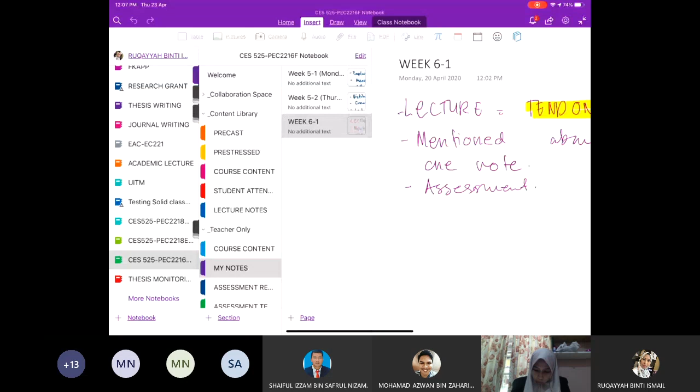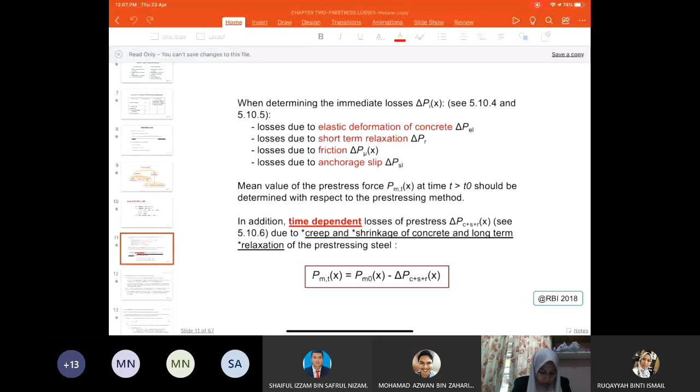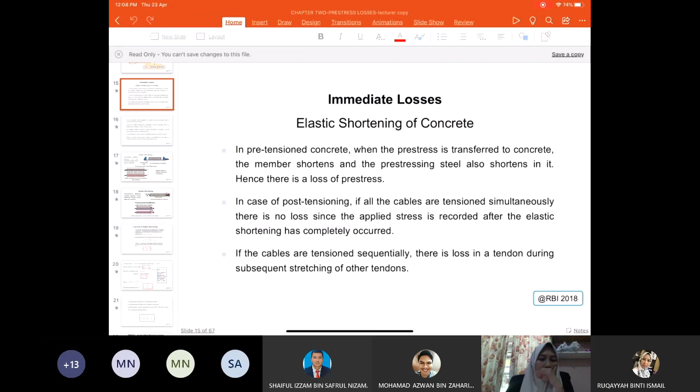Okay, may I know where did we stop last time for your group? I think it's this slide, is it? If I'm not mistaken, am I right? Can anyone correct me if I'm wrong? Anyone?

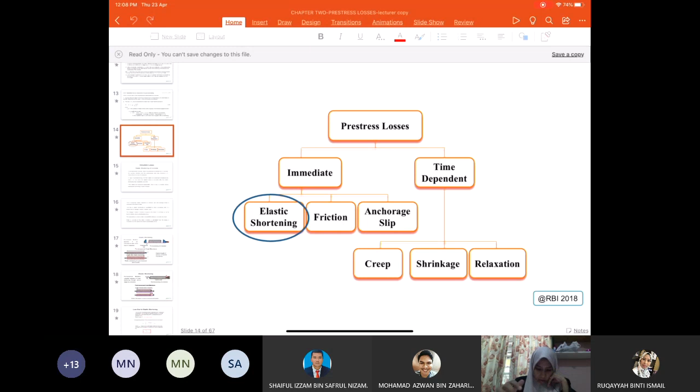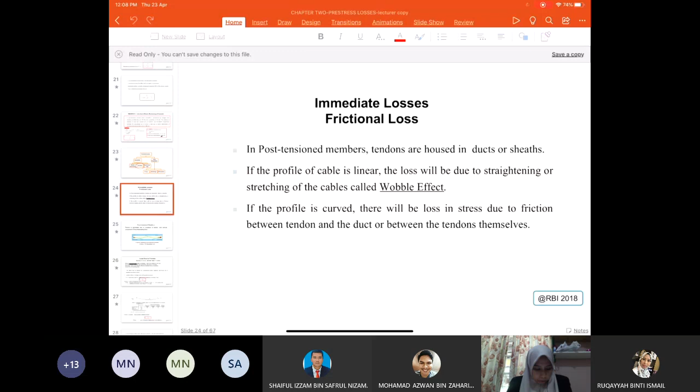Friction loss. Oh okay, we already covered friction loss. So friction loss means we start with friction loss, this slide, am I correct? Yes? Can anyone verify, please, as well? Yes, madam. Okay, all right, yeah. Thank you very much, Azwan, for responding, really appreciate that.

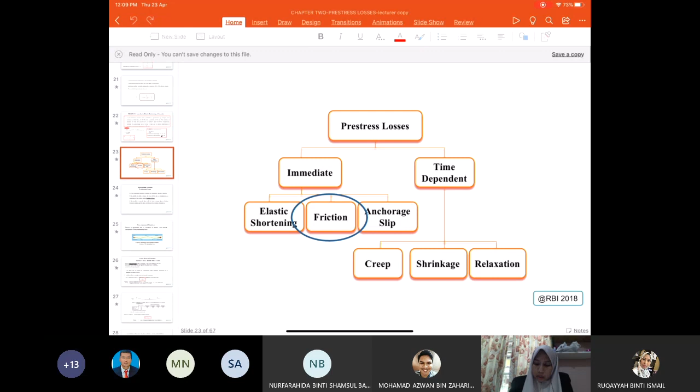Okay, so we're gonna continue our lecture, which last time we stopped at elastic shortening. Sorry about being a bit lost there, because your group started with 2 hours and then had 1 hour later, while the other two groups started with 1 hour, so then we continue with 2 hours. Normally I finish this pre-stress loss slide within 2 hours, so for your group you kind of stopped in the middle of the lecture because you had 2 hours first, and then the remaining 1 hour is where I get to finish the slide. All right, so we're going to continue.

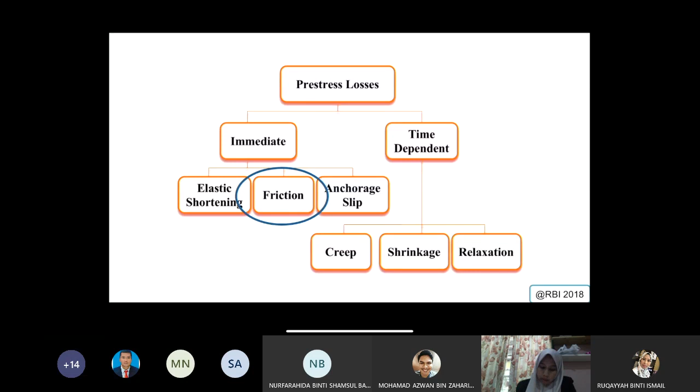Bismillahirrahmanirrahim. Okay, all right, so friction, yeah. So we go to the second immediate pre-stress loss, which is friction. For friction, we call it frictional loss, all right? So for friction, why is there friction?

Friction exists due to, when we have post tension. When we have post tension, then we have what we call a duct, and also a sheath, where we place the tendon inside the beam. We have to have the duct because we do the concreting first before we pre-stress the tendon. So the reason for that is, if you can recall our tendon profile before.

We have two conditions of the cable, right? So the cable can be a straight line, meaning linear, or it could also be a parabolic cable, meaning it has a curved area, a curved behavior.

So when you have that, especially in a post tension member or beam, basically your duct also will behave like that. Meaning if the tendon is a straight line, then your duct is also straight. If your tendon is a curved or parabolic tendon, then your ducts will also be curved. So when you apply your force, when you want to pre-stress and pull your tendon, it's not really an issue if it's linear.

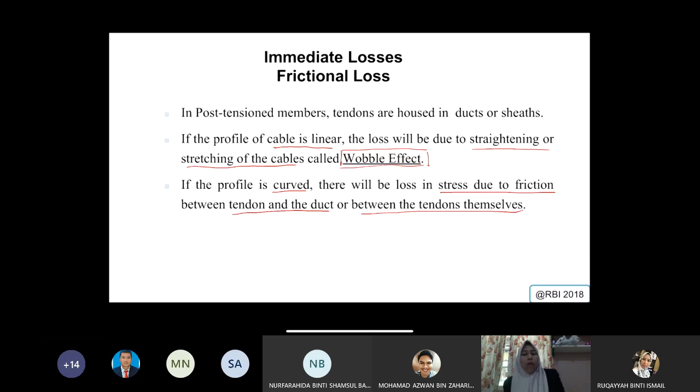Okay, so if the profile is curved, there will be loss in stress due to friction between tendon and duct, or between the tendons themselves. Okay, all right, so that's what happened.

So we have an example here where we have a curved tendon along the length of the beam. You see that the tendon is curved like this. So what you see here is the duct bed generally, and this is all the cable inside.

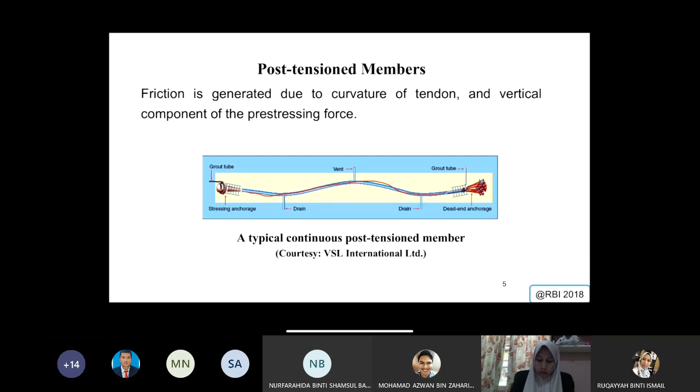So friction is generated due to curvature of tendon and vertical component of the pre-stressing. According to the BSEN code, the friction will tend to resist this movement, hence reducing the effective pre-stress force at position remote from the jacking point. Okay, so this is what I explained before.

Okay, first we look at straight tendon, linear tendon, which is not parabolic. So in the case of linear or straight, generally we can use this equation.

So you have px, which is cable force at distance x from jack, and p naught, which is the jack force, and e here is not eccentricity, it's actually based on Napierian logs, which you can take as value 2.718. And you could use the K value in a range of between 0.005 to 0.01 radians per meter.

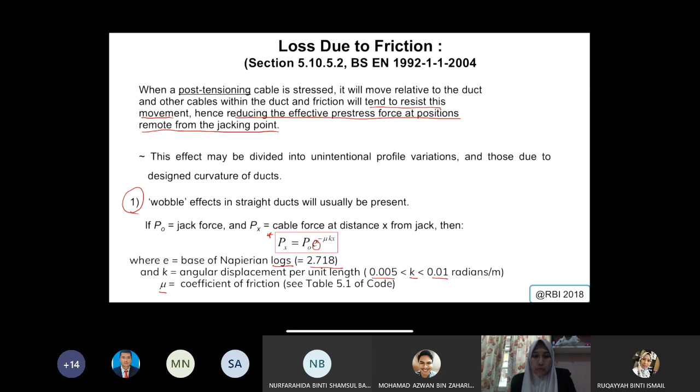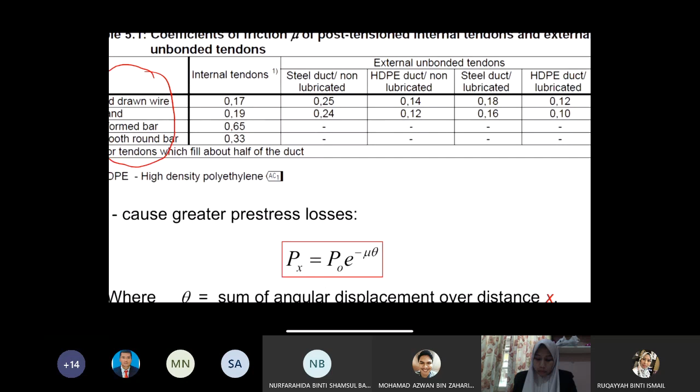And then you have mu, which is the coefficient of friction. To get mu, you refer to table 5.1. When you refer to table 5.1, what you will look at is actually the type of tendon that you use. Either it's an internal tendon, or it's an external unbonded tendon.

So if it's for internal tendon, you can simply take the value of your coefficient of friction. If it's for external unbonded tendon, you have this condition, where you have to choose what kind of duct you are using. Is it steel duct? Is it high density polyethylene duct? Is the duct lubricated or not?

As we know, lubrication, when you grease or lubricate your tendon, any lubricant you can use, it will reduce the friction. So that's why when you choose your coefficient of friction, it's very important to identify whether your tendon is lubricated or not, because the value of your coefficient will differ from the non-lubricated one.

Non-lubricated will of course be higher than the lubricated one. So here's the first condition, whereby when the duct or tendon is linear, it's a straight line. If the duct is curved, it means there's a parabolic shape, and of course it will experience greater pre-stress losses compared to the straight line.

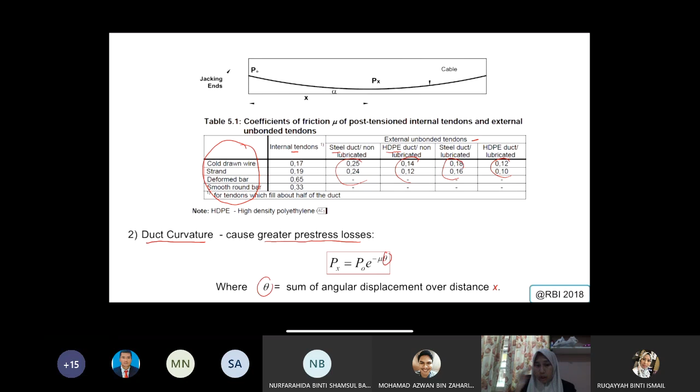One of the obvious differences will be the existence of theta, which is the angular displacement over distance x, for the position of the tendon. In accordance with the code, loss due to friction can be estimated from this equation, where theta is the angular displacement, k, and x is as stated here.

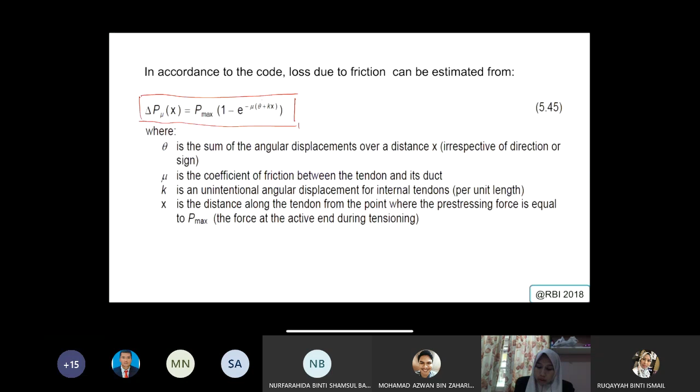If you look into the example, this shows you how to calculate the loss due to friction. In this example, they give you three conditions of cable: cable 1, cable 2, and also cable 3.

Cable 1 is parabolic with eccentricity of 50mm above the centroid at the support and 50mm below the centroid at center of span. Cable 2 is also parabolic, with zero eccentricity at support and 50mm below at the center of span. Cable 3 is straight with uniform eccentricity of 50mm below the neutral axis. So you have different positions and eccentricities, and at the center span also different.

If the cables are tensioned from one end only, it's because it's a post-tension. Estimate the percentage loss of stress in each cable due to friction. Assume K is equal to 0.005 per meter. Given the equation of parabolic cables is Y equals 4E over L squared multiplied with XL minus X squared.

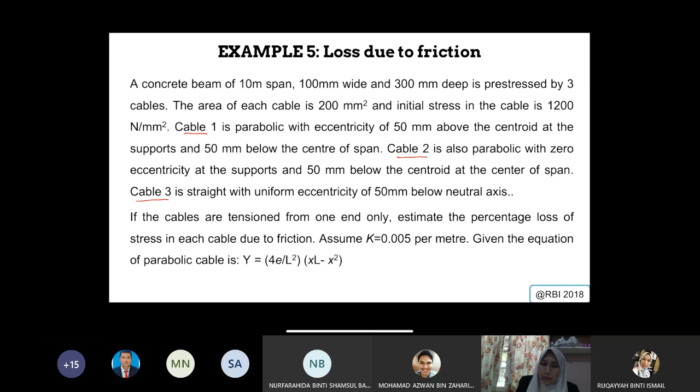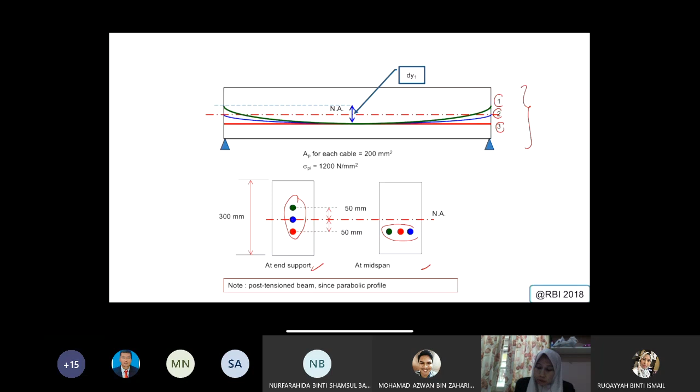So if you look here, this is the diagram of how the cable looks, because we have three cables: cable 1, cable 2, cable 3. This shows the cross section at end span and also at mid span, where the position of the cable is different, the eccentricity is different. You can check back with the question later on yourself.

I just want to show you quickly how they calculate this, considering one by one: cable 1, cable 2, and cable 3. You take the mu by internal strand from table 5.1, so you can decide what type of material you use and so on.

Slope at the ends at x equals 0, you get the slope equals 4e over L. Then you can calculate it and you get theta is actually 0.008 radians. Between tangents, consider tangents, here we have cable 2. The difference will be the value of the slope at the end, because you have a different E here, so it gives you a different theta as well.

The initial pre-stressing in each cable, you're going to get like 1200 for the force multiplied with 200 as the area of the tendon, then the initial force is around 240.

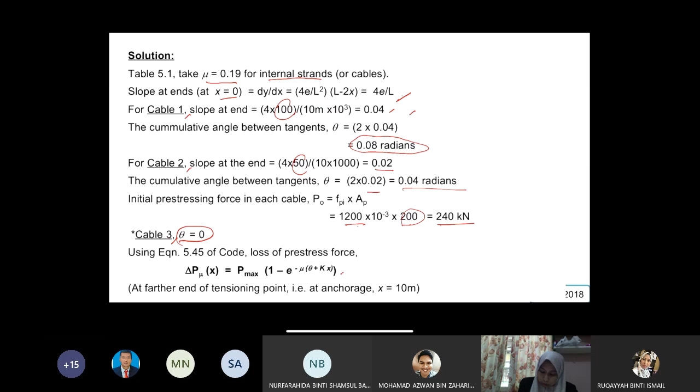For cable 3, there's no slope because it's a straight line, then you have this equation where at anchorage x equals 10 meters. Then loss for each of the cables you can calculate one by one: calculate cable 1 by putting in all the values of mu or K, then you have the loss for cable 2 and also loss for cable 3. Each cable will have its own loss.

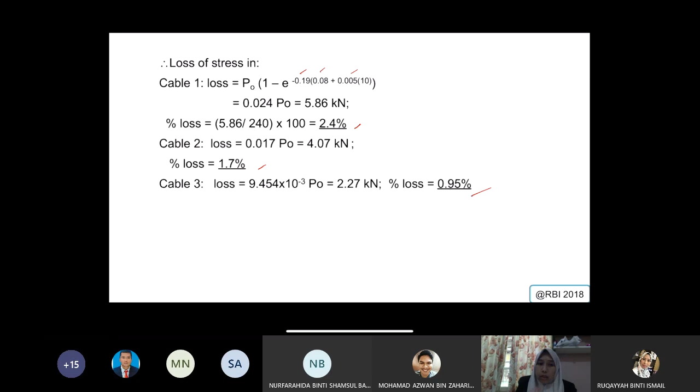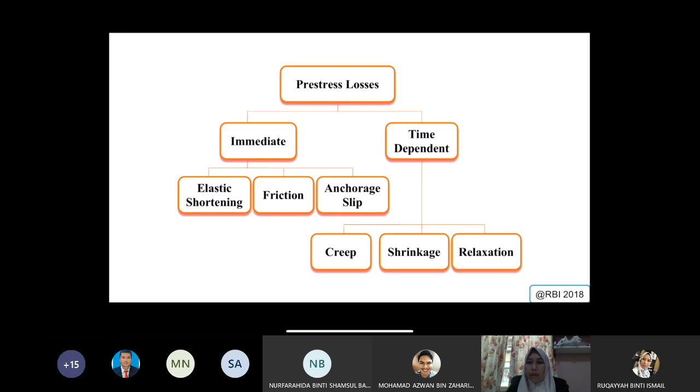If you want the total, then you will total each contribution from each cable. Do I make myself clear? Fatim Nadia, are you clear?

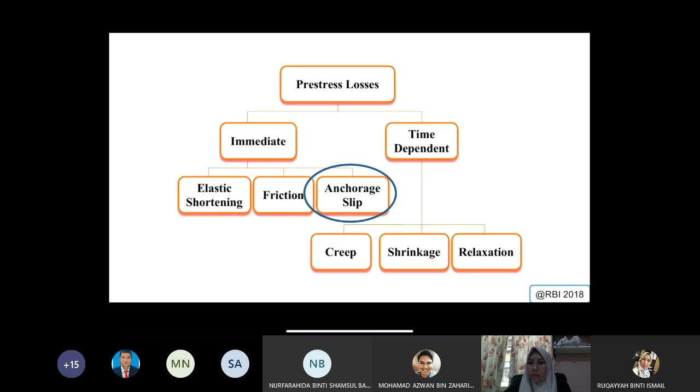All right, so next we'll go for anchorage slip. Friction loss and anchorage slip is only experienced by post-tensioning systems, not by pre-tensioning systems, because the prestressing method is conducted after concreting. So these losses will be considered for post-tensioning.

In most post-tensioning systems, when the tendon force is transferred from the jack to the anchoring ends, the friction wedges slip over a small distance. The behavior is actually simple to understand: if you have something very tight, like a bolt screw, and you have a bar, and you try to pull the bar, what will happen? The connection gripping the bar is trying to hold the bar from moving.

When the force is so big, so strong, it will somehow be able to move the tendon, the bar. What will happen to the one gripping the bar? The grip, the system that's gripping the bar, will also move. There will be some kind of movement, because it's letting the bar go towards the force slowly, or gradually.

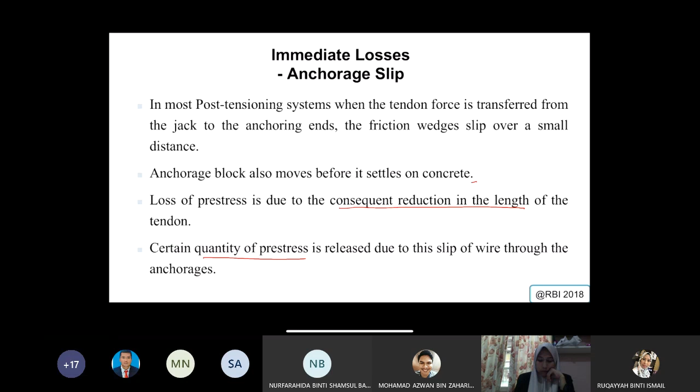Loss of pre-stress is due to the consequent reduction in the length of the tendon. We consider that when the length is shortened, there is a loss of pre-stress. A certain quantity of pre-stress is released due to this slip of wire through the anchorage. This is what we were talking about before.

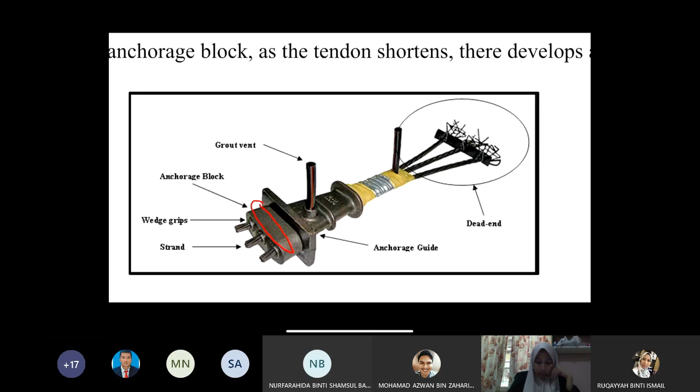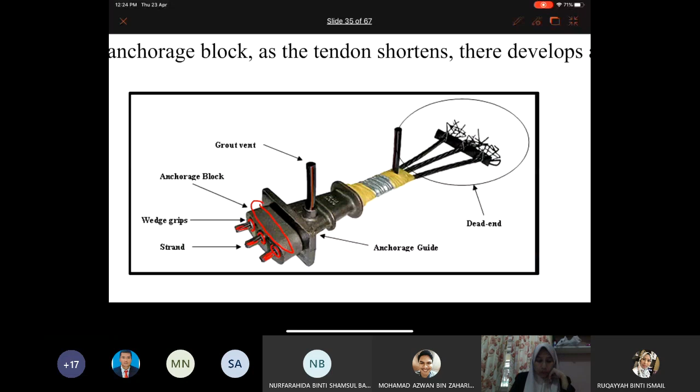If you look into this picture, here is what we call the anchorage block. This is the one holding the tendon here. If you can see this one, it's like a ring in the picture. I cannot enlarge it anymore; this is the largest I can show.

This is the wedge. The wedge functions like a washer, like a ring, in between bolts and nuts. Normally between bolts and nuts we have the washer. We have a washer to reduce the friction, the direct friction between the bolts and the nut.

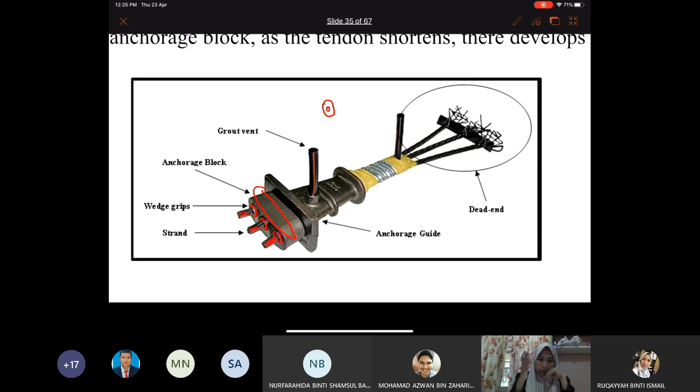So it's the same thing here. The washer is actually holding between the anchor grip and the tendon movement, when the tendon tries to move because you pull with the jack.

So the amount of slip depends on the type of wedge and the stress in the wire. The magnitude of slip can be known from the test or from the patents of the anchorage system.

So loss of stress is caused by a definite total amount of shortening, as we talked about before. The percentage loss is higher for a shorter member, because of the concentration of the force applied.

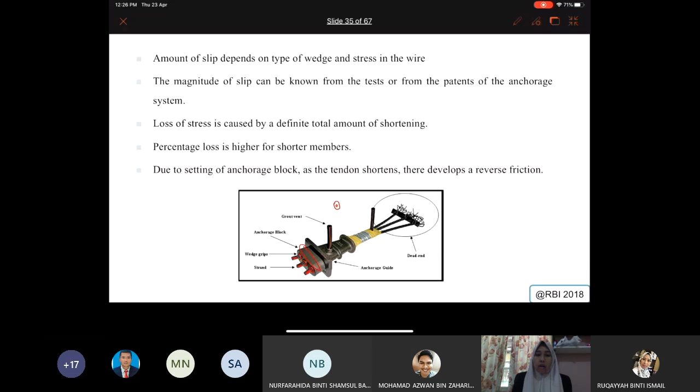Due to the setting of the anchorage block, as the tendon shortens, there develops a reverse friction because of the anchorage. So let's see how the loss is considered in anchorage.

In most post-tensioning systems, when the cable is tensioned and the jack is released to transfer pre-stress to concrete, the friction wedges employed to grip the wires slip over a small distance before the wires are firmly housed between the wedges. So there will be a movement, the movement that causes the anchorage loss to happen.

The magnitude of slip depends upon the type of wedge and the stress in the wire that we apply. Wedges are like washers as well; there are many types of wedges, and every wedge will contribute in different ways, able to reduce the loss.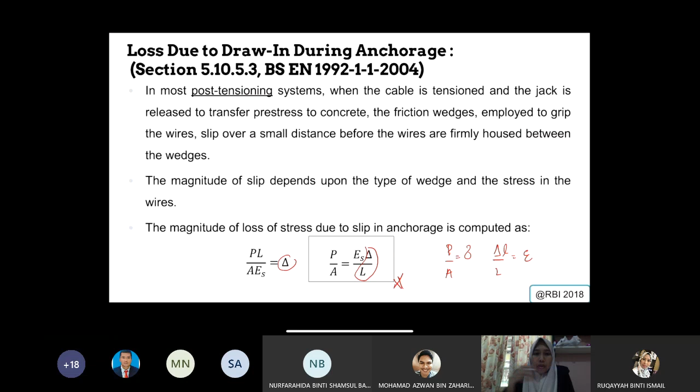Anchorage loss can be accounted for at the site by overextending the tendon during the pre-stressing operation, by the amount of draw-in before anchoring. So loss of pre-stress due to slip can be calculated, where you have a slip of anchor. This is a simplified version, but from the equation it's actually the same one.

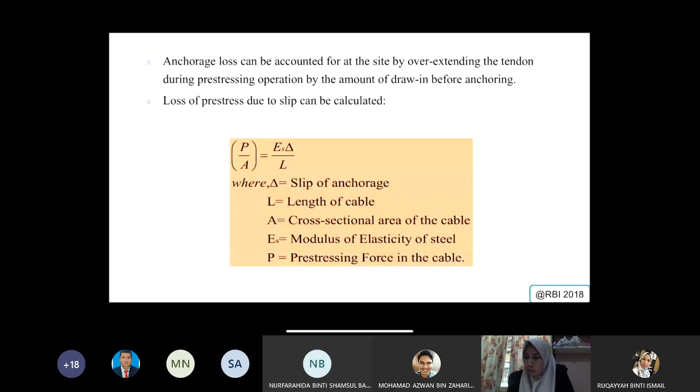A concrete beam is post-tensioned by a cable carrying an initial stress of, let's take a look at the example, shall we. Initial stress of 1000 Newton per mm square, the slip is around 5 mm, and the modulus is around 210 for steel. So we want to see the effect on a long beam and a shorter beam. We have a long beam about 30 meters and a shorter beam about 3 meters.

So, loss of stress - it's a very straightforward calculation whereby you just apply this equation, and we know that the strain given here is around 5 mm, which is the slip. It gives you directly what would be the slip.

What would be the slip? The shortened part, which is 5 mm. The slip is 5 mm. Multiply with E, and directly you get how much is the loss. It really depends on the distance of the slip - once you measure the distance of the slip, you're able to directly get what will be the loss of stress. Then you get 3.5%, and here you get 35%.

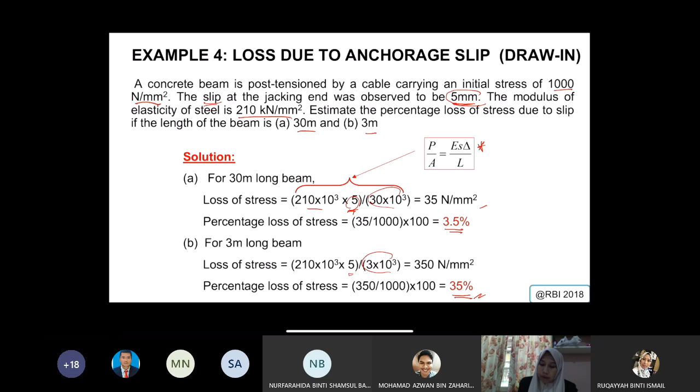So this kind of proves that when the beam is shorter in length, the loss in your anchor will be bigger. Regardless, it's the same slip, like 5 mm, it's still the same - it's just that when your length is shorter, then your beam will experience more loss in terms of anchorage. Alright, am I clear? Everyone can follow?

Okay, Asan, okay? Ahmad Asan, Izam, Inshira. Okay, madam. Mirza, okay, I hope everyone is okay. Yeah? Okay.

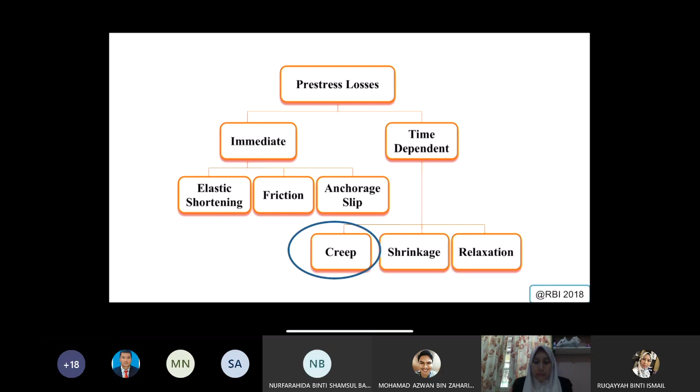Okay, let's look at how it performs. One factor will be creep. I'm sure everyone is familiar with concrete creep. We know that creep is not going to happen overnight—creep always happens through time. You can only see it maybe in 5 or 10 years or something like that.

You can see the degradation of the concrete itself due to the quality of the concrete material. It might be because of the age, the stress that you apply, the density of the material itself, the cement content, the grade of the cement, the quality of the cement, the water cement ratio—is it high, is it too dry, and so on.

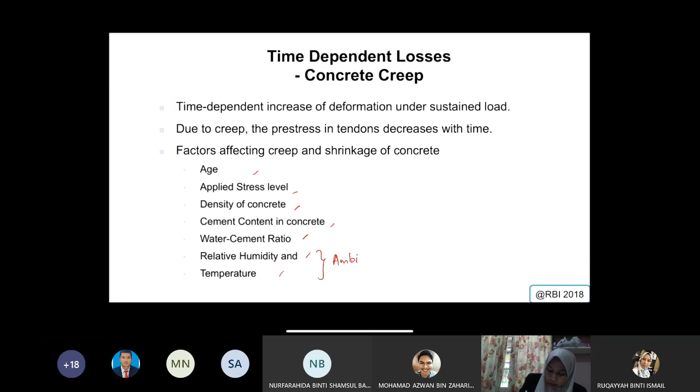Humidity and temperature, which is related with the ambient conditions of where you place the prestress beam.

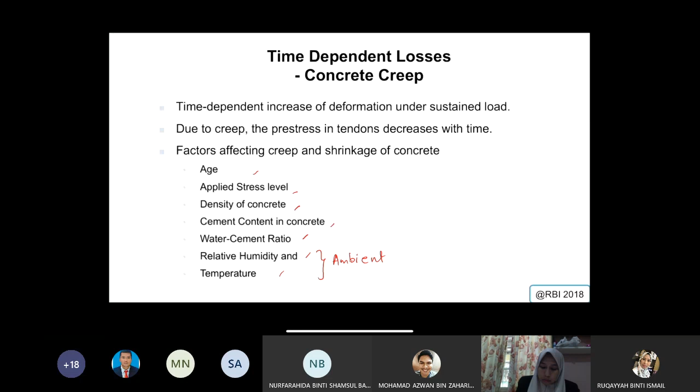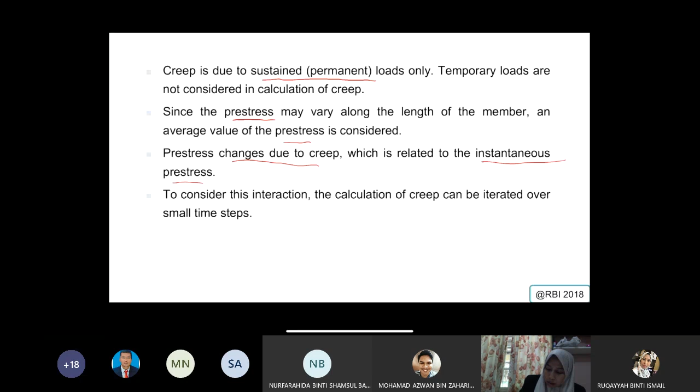So creep is due to, for prestress we say that creep is due to permanent loads only, where we try to estimate what is the creep loss. So temporary loads are not considered. Since the prestress varies along the length of the beam, an average value of prestress is considered. So changes due to creep are related to instantaneous prestress. To consider this interaction, the calculation of creep can be iterated over small time steps.

So in this case, what we estimate is actually we consider the use of the creep coefficient. I think we've used this before—you guys came across this value, if I'm not mistaken, in your RC design when you design for your slender column. One of you asked me about this, and then I remembered, oh okay, it's the same.

The creep strain is actually the one that you're going to use in terms of calculating what will be the total stress loss—meaning what is the loss of it. Then you'll be able to calculate the loss.

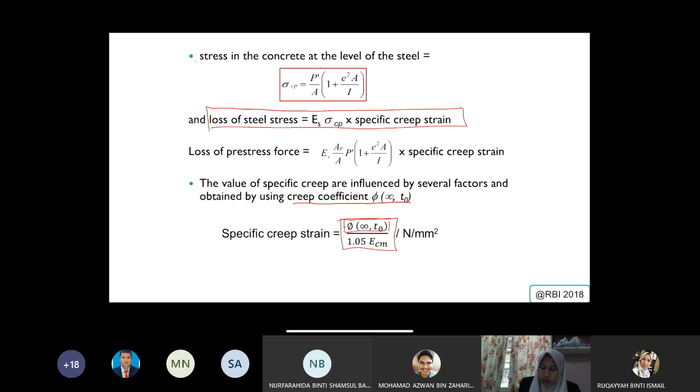So let's take a look at the examples here—it's a very straightforward example. If you look here, you have 100 mm times 300, the E50, the area of the cable, the final stress, and what will be the ultimate creep strain, the stress, and E.

And what you do is just use this equation to get your stress. This is where you calculate your tendon force, in kilonewtons, by considering the area of the cable. Multiply with the stress of the cable, then you get the force. And this is the initial moment—second moment of inertia.

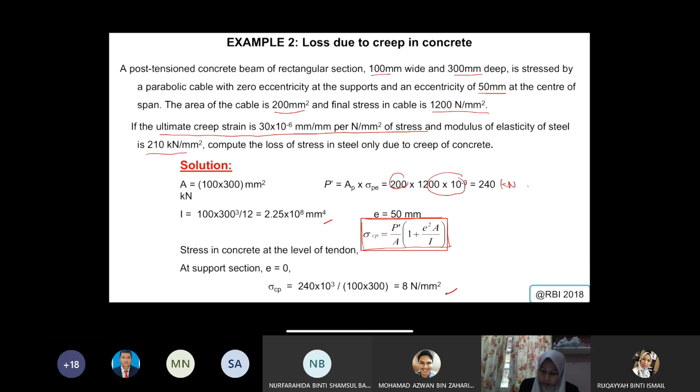Then you have this at the support section where E gives you the stress—what will be the stress loss, 8 Newton per mm squared. So once you get the 8, this is the value, the stress CP. Then you calculate at E 50 mm—just now you calculated for E at 0, here is E at 50, then you get 10.7.

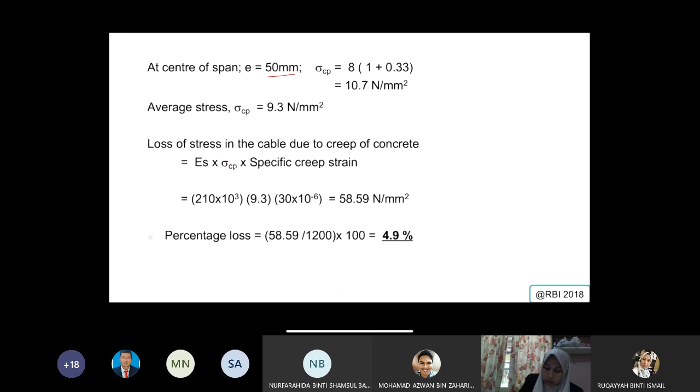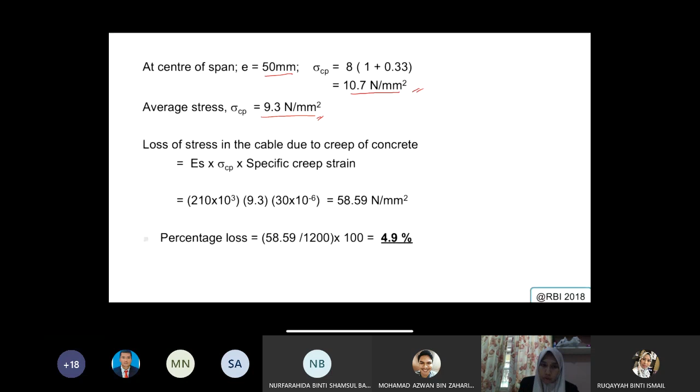So the average is around 9.3 for both conditions, because we want it throughout the length, so we just take the average value of your stress. Once you get your 9.3, multiply with the specific creep strain given in the question, plus times the modulus E, then you will get around this—this is the total stress.

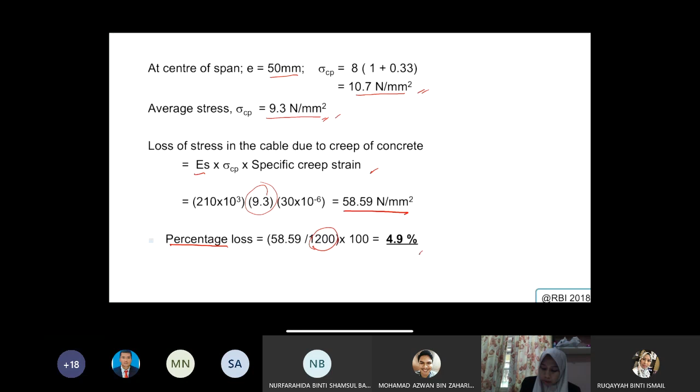The important thing is the average stress that you calculate for each condition of your E. Then the loss, the percentage of loss divided by the initial stress applied, multiplied by 100, gives you around 4.9% for the creep loss. Hope you guys are clear about that.

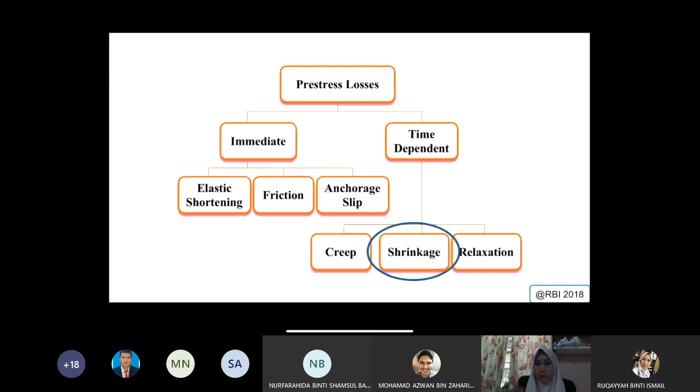So next we go for shrinkage. For shrinkage, normally for concrete, when you have creep, you're always going to have shrinkage as well—it's like a good pairing.

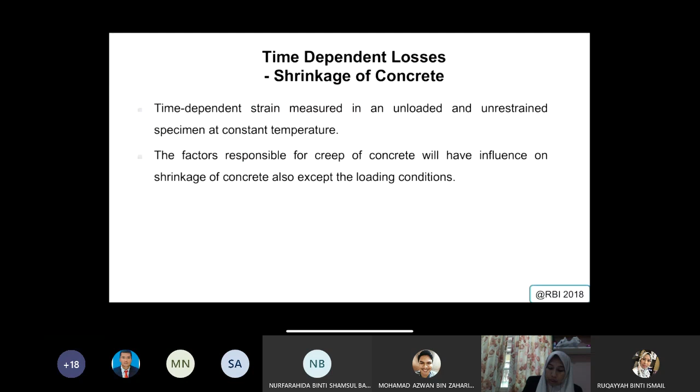Time dependent strain measured in an unloaded and unrestrained specimen at constant temperature. The factors responsible for creep in concrete will also have influence on shrinkage of concrete, except the loading condition. Due to shrinkage of concrete, the shrinkage to be considered depends upon the following factors.

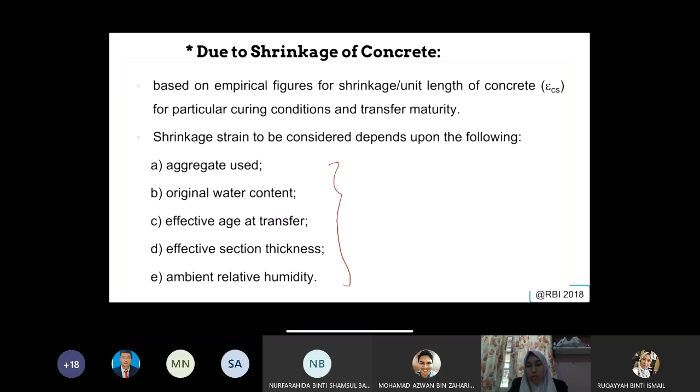It's the same as what you have for creep. It all depends on the material quality, which is the type of aggregate used, the water content, the age at transfer, whether it is too early or too late, and the effective section thickness.

And what will be the ambient condition, the humidity, the temperature, and so on. For shrinkage, humidity is one of the important factors to be considered when you want to calculate shrinkage. This example is taken from Mosley's book.

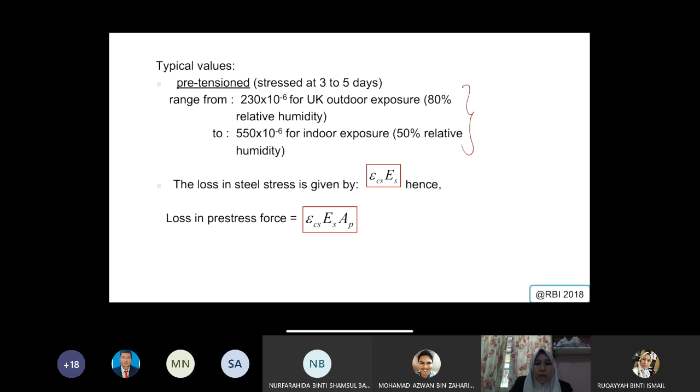The main reference is from the Eurocode, along with the UK annexes. That's why the value of 80% relative humidity, 50% and so on, is all based on UK temperature data.

So the loss in steel stress is given using this approach. For Malaysia, you just go to the Malaysian annex, then you will get the data for our country.

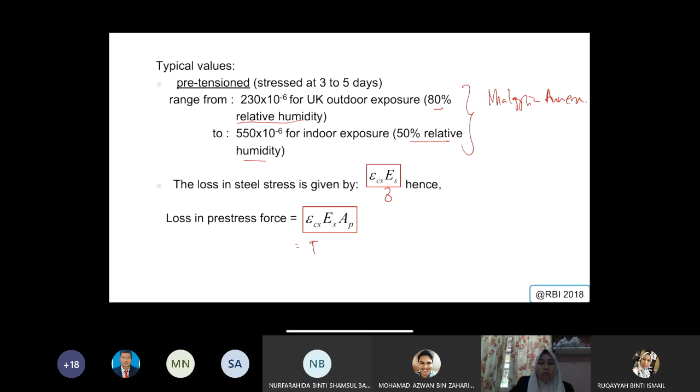The loss in steel stress is given by strain CS multiplied with modulus, and then you have the force, because this is already the stress, you multiply with the area, then you get the force.

Since the tendon is placed inside the concrete, any movement of the concrete will kind of affect the tendon directly. So the losses, even though it's the concrete which experiences the shrinkage, somehow it will affect the tendon.

A concrete is prestressed by a cable carrying an initial prestress force of 300 kilonewton. The cross-sectional area is 300 mm square. Calculate the percentage loss of stress in the cable due to shrinkage for the pre-tensioned beam.

Assume Es is 210 kilonewton per mm square and the total residual shrinkage strain is about 300 times 10 power minus 6. This is the important value actually, the total residual shrinkage, is where you're gonna use it.

This somehow is going to be placed here, which will give you what will be the value for your loss of stress. When you calculate, you divide with the initial stress, then you will get around 6.3%.

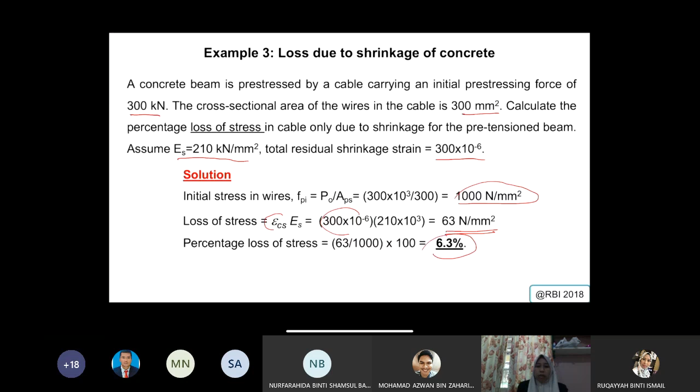So if you notice, in terms of prestress loss, the calculation is very straightforward. You're calculating the loss depending on what will be the value of each parameter that caused the loss.

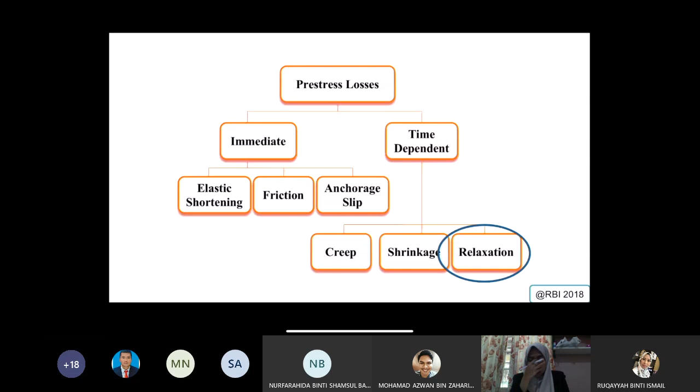Lastly will be steel relaxation. I don't want to talk much about this. Basically, we talked about how steel behaves before, where it goes linear, goes plastic, goes into hardening, and then it will fail.

When you go elastic, then when you let it go, it will go back to its original state. When it passes through plastic, when you let it go, it will not go back to its original. So when you go back, it will go back somewhere here, and then you have some stress losses experienced by the steel.

So in a way, we say that decrease in the stress is due to the fact that some of the initial elastic strain is transformed into inelastic strain under constant strain. This means a constant strain is applied, so the stress decreases according to the remaining elastic strain.

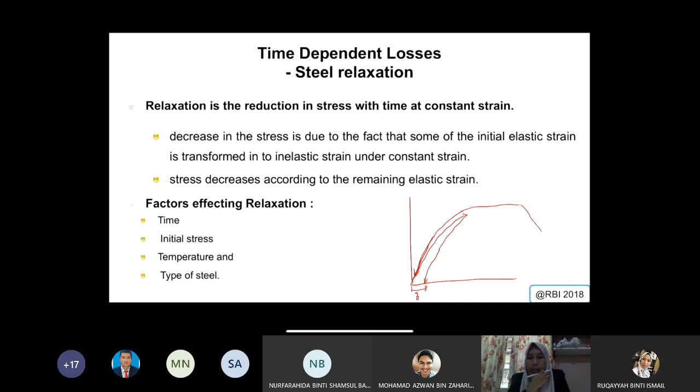So there's a gap. Factors affecting relaxation include time, initial stress, temperature, and also the type of steel, since we're talking about steel. The properties matter, like the composition of manganese, carbon, iron, and so on, and also what the initial stress applied is.

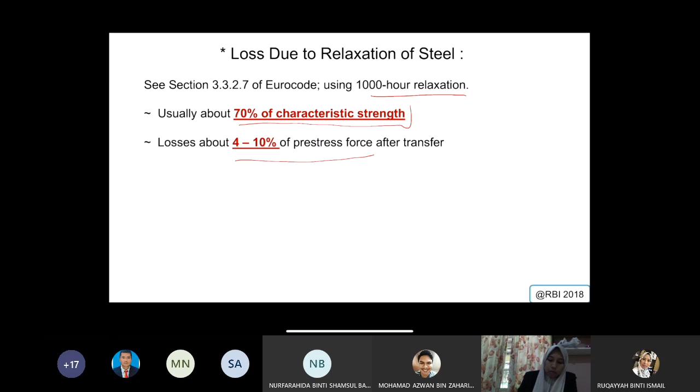Okay, so losses are about 4 to 10% of pre-stress force after transfer. So you can consider the pre-stress force losses to be about 4 to 10% after transfer. So this is what we can conclude for relaxation of steel.

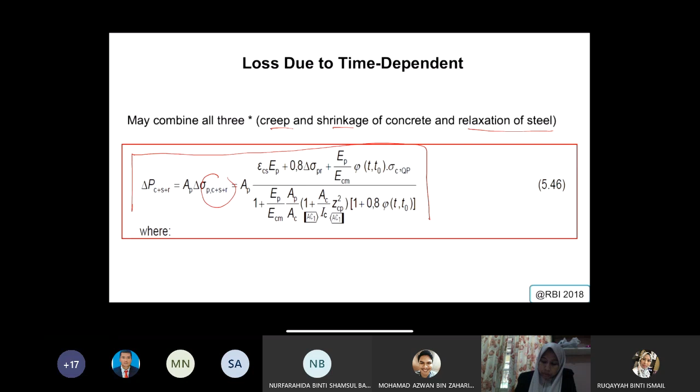So when you calculate the loss due to time dependent factors, you can include all, meaning you include creep, shrinkage, and also relaxation. So when you combine all the equations, you will get this equation. Okay, so this is the acronym, the abbreviation.

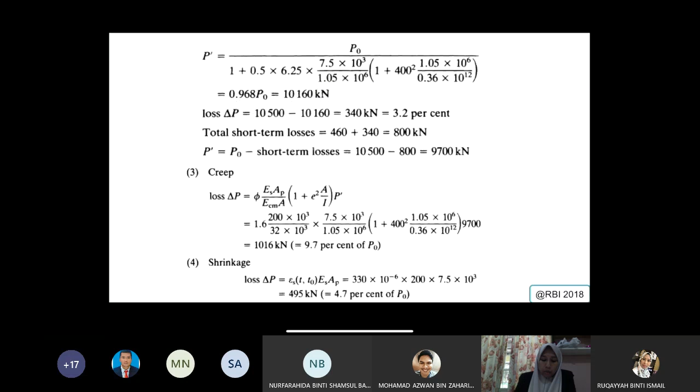Okay, so here I already released an assignment for you to go through. I want you to redo this example. This example is actually taken mostly from the Bungey book, it's not something different. But try to redo it and then just hand it back to me in your OneNote, just for me to see, because I want you to go through this example yourself.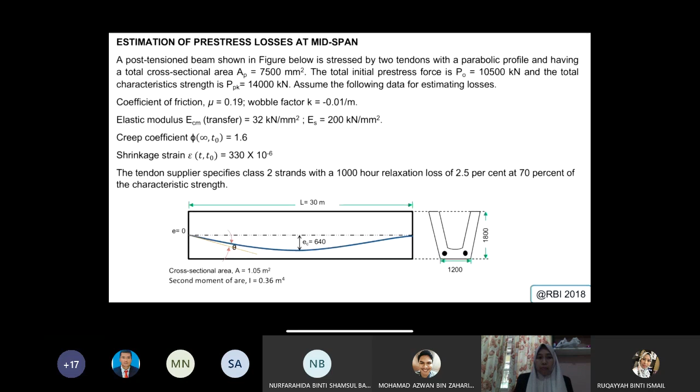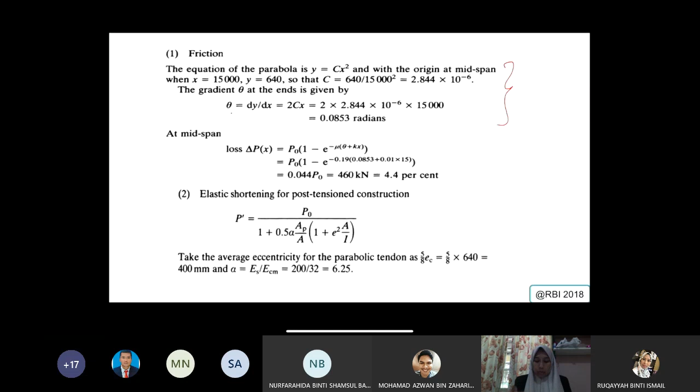All right, so try to go through and put the equation, using the equation by putting in the parameters given in the question. Okay, so please redo this and then attach it in your OneNote so that I will take note of whoever has done it or not.

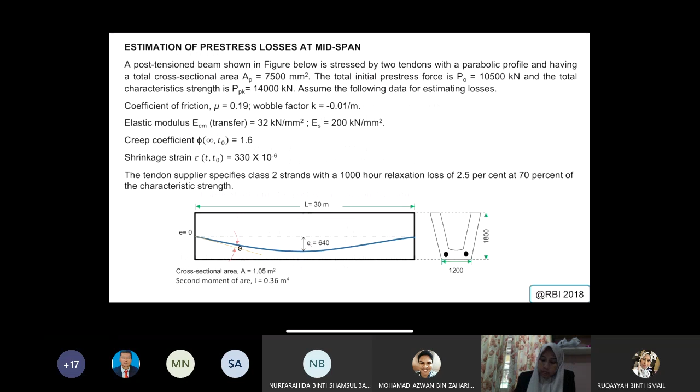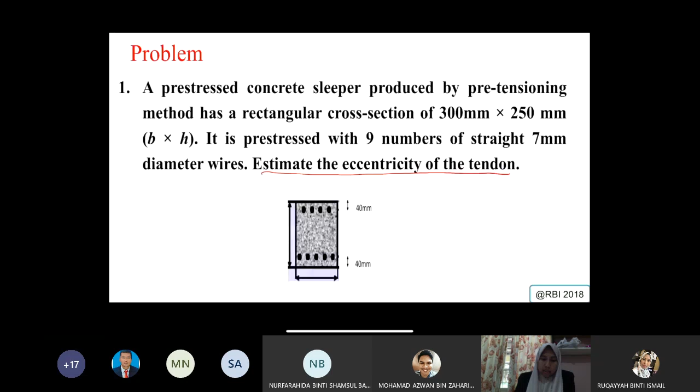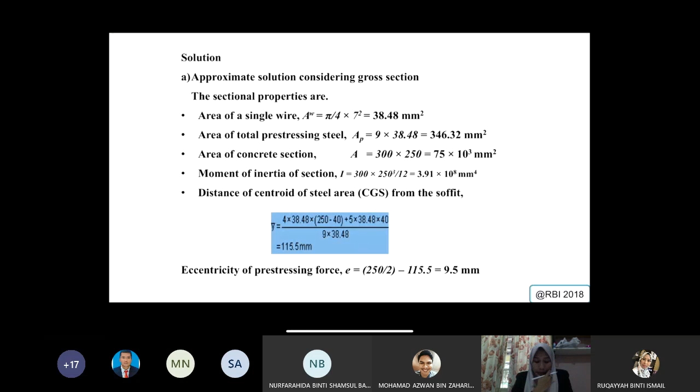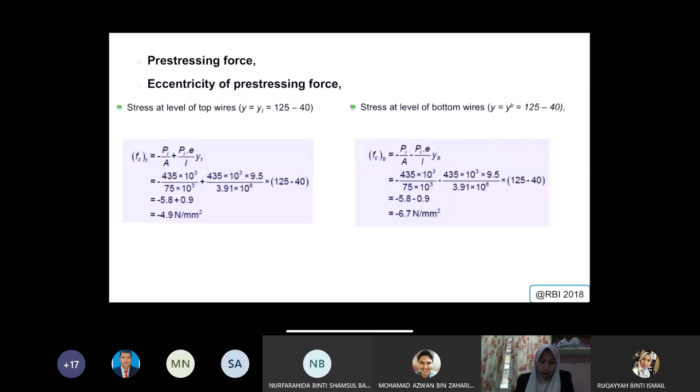Okay, so on the next slide you can see an example for you to know when you have to estimate eccentricity of the tendon. I placed this example earlier in the beginning of the slide, so I just put it at the back as another example towards the end. Okay, so you can relook at the example, try to recall how it will affect the calculation of the elastic losses.

Okay, any questions, soalan? Any questions, soalan, before we end?

Farahida, any question? Yes, madam. Shaza? Madam? Sorry, I cannot hear you. Can you type something in the chat? After the class, I will figure out what's wrong with my speaker. I don't know, I cannot hear. Amirul Ashraf, you okay? Shaza, Said Shahrul? Understand? Fatiha? Shafiq?

Okay. All right, so I hope you guys can... according to the test next week, do we have to derive equations?

Okay, to be honest, I don't know how the test question will be. It's not me who set the question, so I didn't get a chance to look at it yet. So I really have no idea how the question will be.

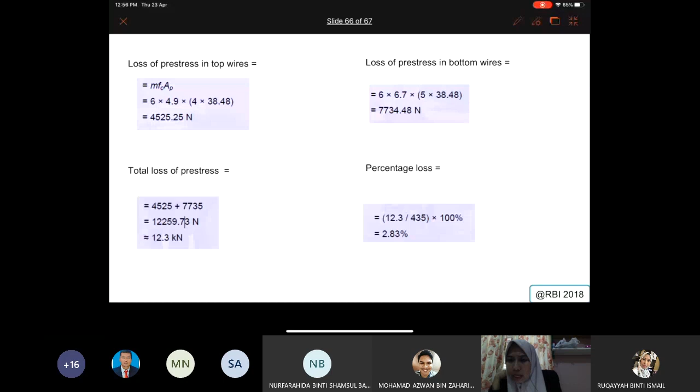Okay, I think that's all. Any else? Test from Wednesday to Friday, which means 3 days, or can we pick any day? To tell you the truth, that is what we want to do. We want to fix the duration of the test at 2 hours, but students can choose any day they want, since it will run from Wednesday to Friday. So supposedly students can choose any time they feel ready to take it. But we are not sure if we can implement it like that yet, because it depends on your quiz tomorrow.

You guys also have to understand this is also a new situation for us, so we have to do some trial and error. That's why we do the quiz first, just to see the best way to implement your test next week. Do you get me? Okay, we'll see. Thank you.